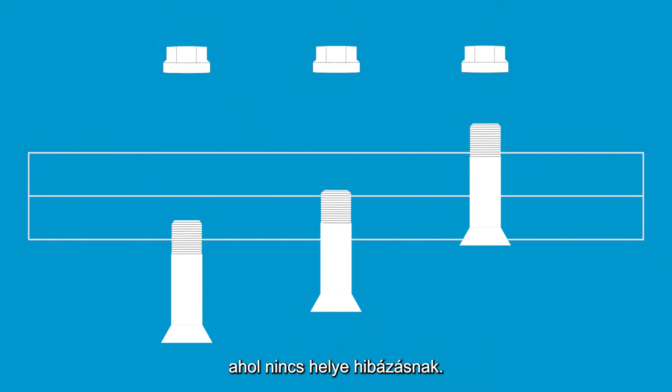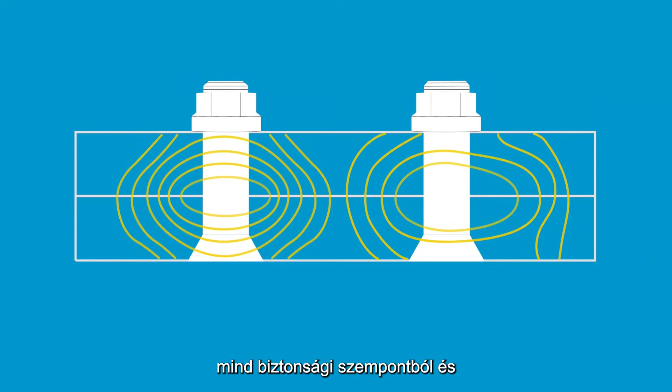Tightening is a fundamental production process in the aerospace industry, where there is no room for error. Even small deviations in the tightening process can have big consequences, both from a safety aspect and from a cost control perspective.

Currently, about 75% of tightening tools used in the aerospace industry are basic clutch tools, air or battery powered. This means that assembly errors can easily go unnoticed due to lack of process control.

We have seen examples where one simple application with an O-ring wrongly assembled and tightened without process control resulted in rework cost and productivity losses amounting to 100,000 euros.

In another example, a customer experienced slowed down production, quality issues, and need for costly investigations as a result of the use of an incorrect batch of nuts coming from a second supplier. This led to a cost of 70,000 euros.

Now imagine that cost and extra work for every single mistake that is made. This can create a big impact on profits.

The solution for the clutch tools issues is to use advanced transducerized tools, which happens in approximately 25% of all aerospace applications. However, these solutions sometimes come with their own set of challenges.

When used in cramped areas, they often can become big and bulky. This makes the operator's job more difficult and ergonomically challenging. And if a critical tightening needs to be done with full traceability, the tool setup procedure may become a demanding task requiring special skills.

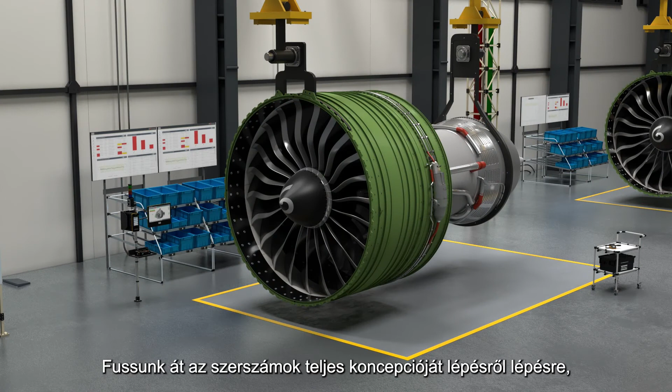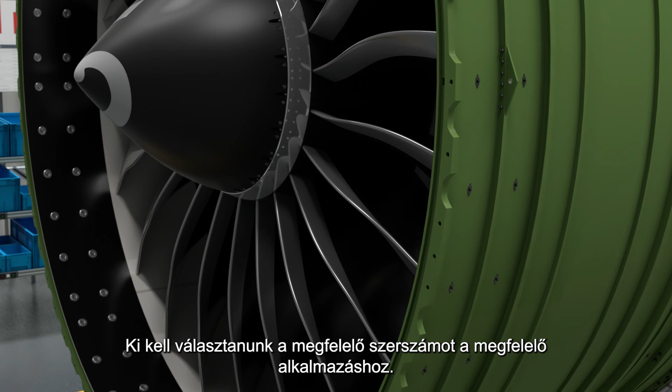Let's go through the whole concept of IxB tools step by step, looking at the example of this final assembly station. It all starts same as always. We need to select the right tool for the right application.

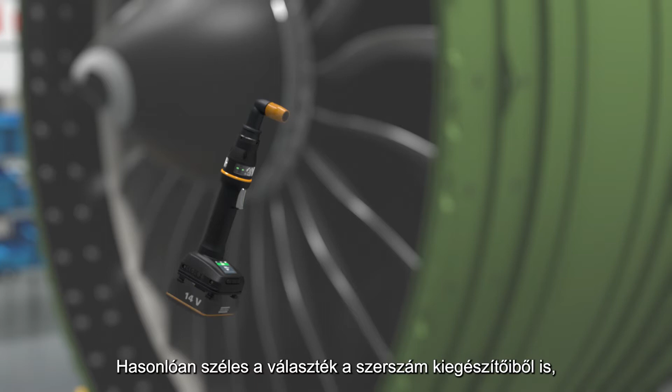In the IxB family, we have a wide selection of different tool models specifically designed to fit exact specification requirements. Once we've chosen the tool, we also have a variety of options for tool accessories, like batteries and front parts. Our tool needs to perform certain functions, and here we'll let you decide its functionality level.

Select from one of the options that you might already be familiar with if you know our Power Focus controller offering. And the final step for the tool that does critical tightening is to set up the process control and communication to the production system, which traditionally was handled by a physical controller box.

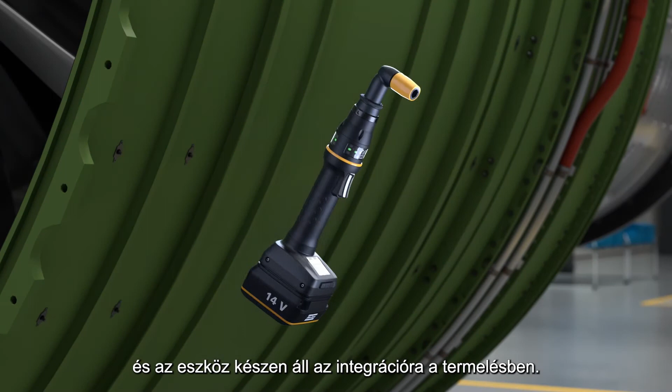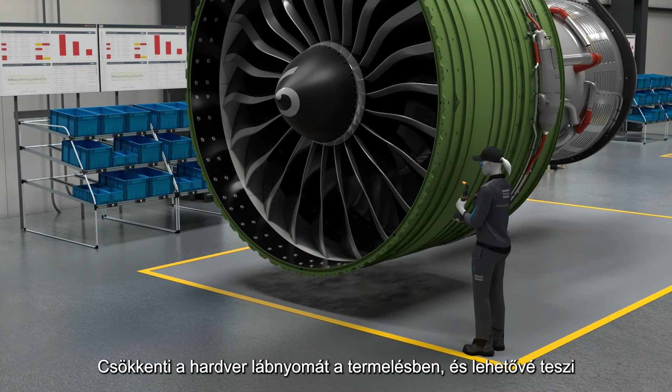Here is where Tensor IxB makes a big difference as our first tool with integrated controller platform. From now on, we have an alternative way to traditional physical controller setup. All you need is to enable the integrated controller function, and your tool is ready to be integrated directly into your production system, fully managed by the integrated controller inside, reducing the hardware footprint on the line and enabling transformation towards a new, smart, flexible way of manufacturing.

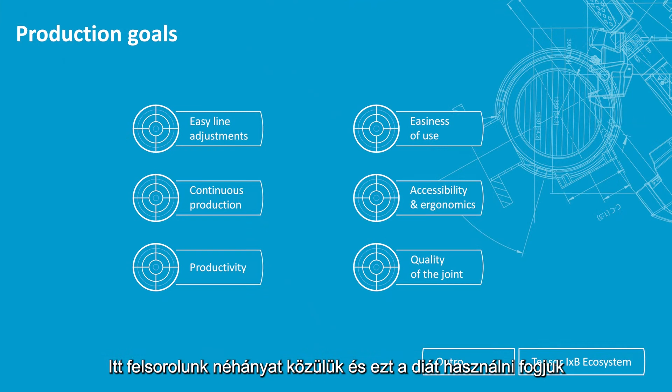Let's look at how Tensor IxB tools with the new integrated controller platform can help you achieve your production goals. Here we have listed some of them, and we will use this slide to navigate between different aspects of production where the new Tensor IxB makes a difference.

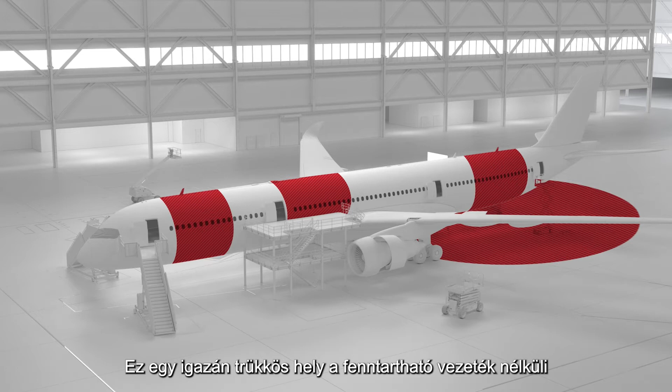Let's look at the goal we call continuous production, describing how Tensor IxB can improve your uptime in challenging connectivity environments. When you look at the aerospace industry, it's a really tricky place for sustainable wireless connection, with lots of closed metal environments and huge facility areas, where today usage of wireless tools with controllers is almost impossible without getting into the radio shadow environment, which leads to many challenges.

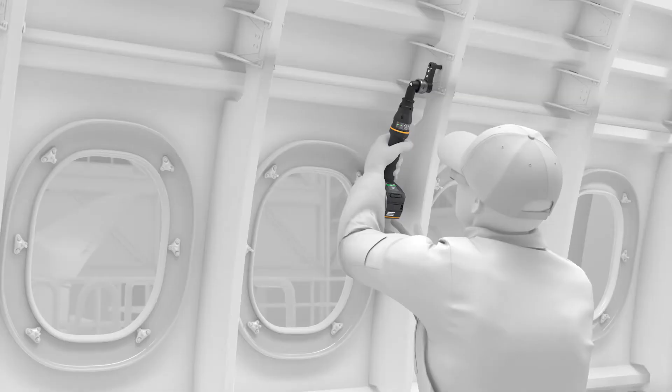But from now on, things are about to change when Tensor IxB can allow us to continue production even when there is no wireless connection. How will it work? Let's look closer.

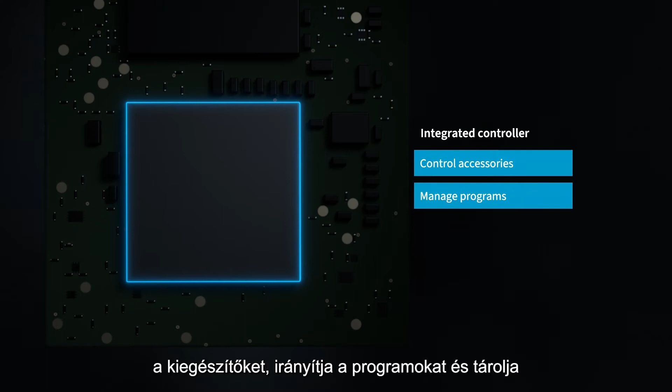It's all possible with the integrated controller, which is able to autonomously control accessories, manage programs, and buffer result data. It will send all data to the production system when connection is restored. On top of it, IxB tools have dual antennas to reduce the risk of bad connection due to obstacles or interference with operator hands. This, together with a buffer battery, will maximize the wireless connectivity uptime.

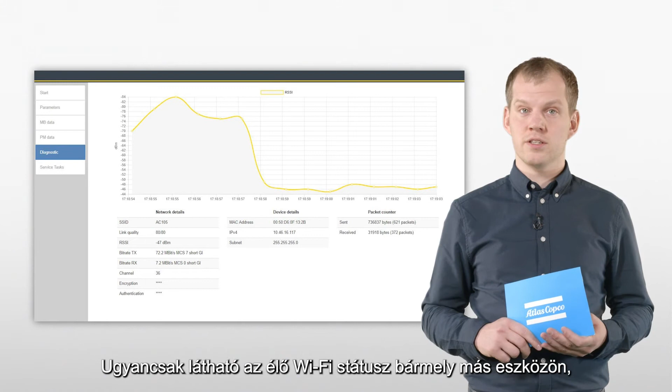And while talking about good wireless connection, you can now see a live Wi-Fi status on the tool display to quickly troubleshoot and solve connection problems. You can also see the live Wi-Fi status on any devices, bigger screens or laptops, for deeper investigation.

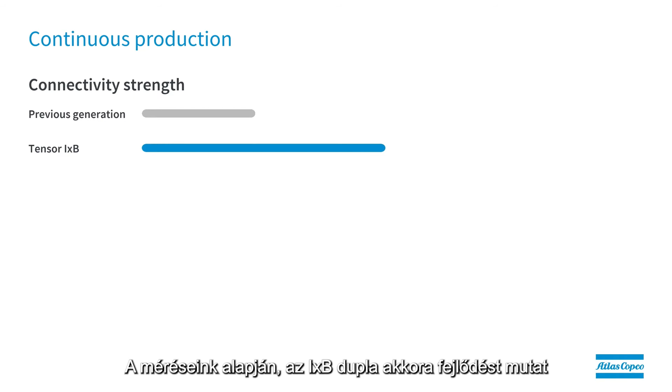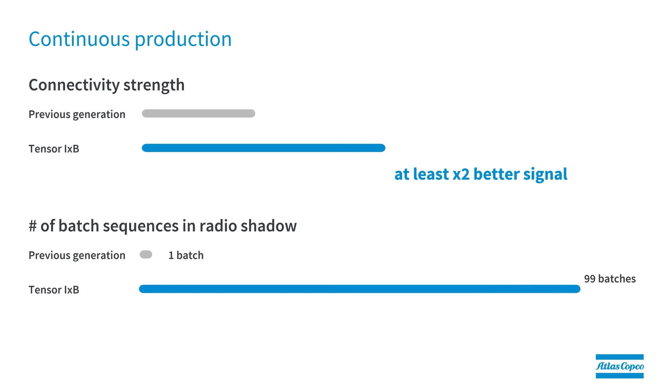If we compare today's battery tools to the new IxB tools, we see a dramatic improvement in wireless connectivity. According to our measurements, Tensor IxB tools show a double improvement in signal strength. And unlike the previous generation of tools, IxB can handle different tightening programs while being in the radio shadow. In summary, Tensor IxB tools help you keep a seamless production flow in challenging connectivity environments.

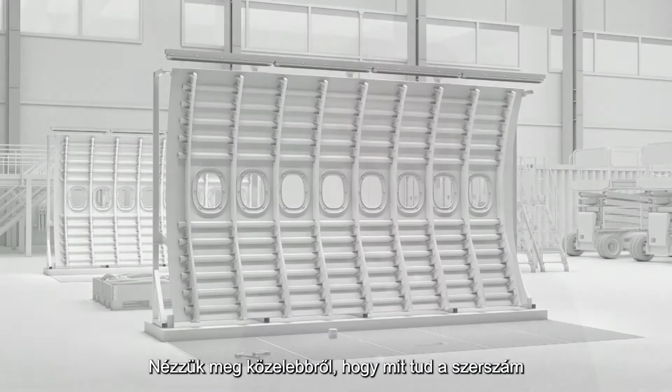Let's go back to our production goals. Let's look at accessibility and ergonomics. Here we have a big innovation coming with our Tensor ICB range, a compact nutrunner within the IxB tool family. Let's look closer at what it can do in the example of cramped area applications.

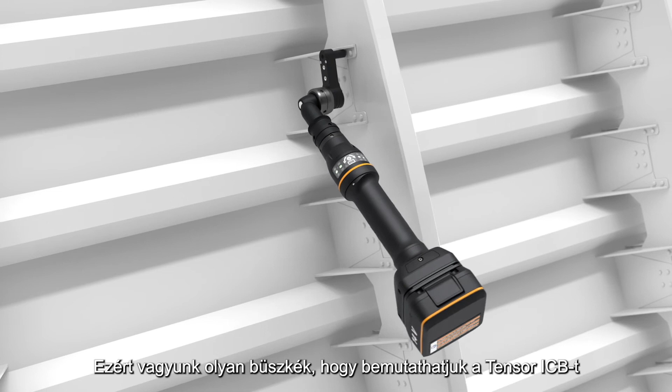There are many ergonomically challenged applications in every production process. Some of them are hard to reach and access. For some, the operator movement is restricted. Others create stress and fatigue to the operators due to unnatural working positions. And we at Atlas Copco have spent a lot of time researching how we can develop a tool that will make operators' lives easier. That's why we're so proud to introduce Tensor ICB, which gives ergonomic access even to the least accessible joints out there.

In this example, in the aerospace industry, the tool can be combined with a variety of special attachments required by the production process. And if we look closer at the tool itself, there are several innovations that we want to highlight.

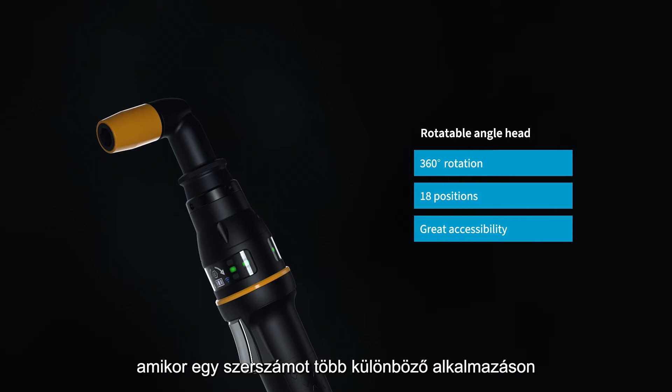First of all, we have a fully rotatable angle head with 18 different positions that the operator is free to change at any time wanted. It gives better access to the joints and creates versatility when one tool can be used for many different applications. Tensor ICB also has a fully rotatable trigger.

It can be adjusted at any time or locked if needed in any of its 20 positions. It means that you can adjust the grip position of the tool to make it more suitable for the particular application and experience Tensor ICB's superior ergonomics in your own way.

And on top of it, together with the new ICB tool, we are releasing a new 14-volt battery, the smallest battery in the IxB tools family. It's very lightweight and can be used with different tools from both the ICB and ITB tool ranges. Now let's compare Tensor ICB to our previous generation of battery tools.

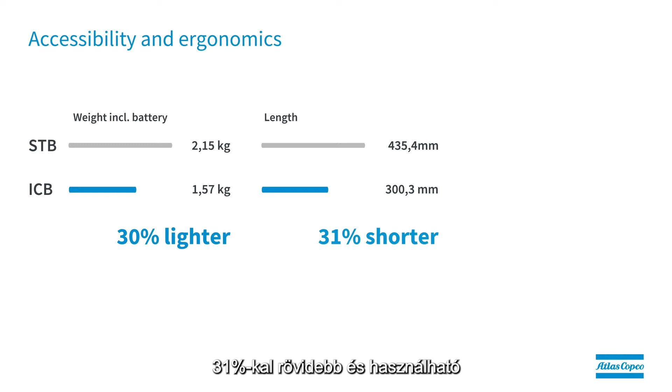You can see that ICB is 30% lighter, 31% shorter, and can be used with only one hand, which gives an operator the option to free up another hand if needed. All this makes Tensor ICB a perfect choice for cramped area applications.

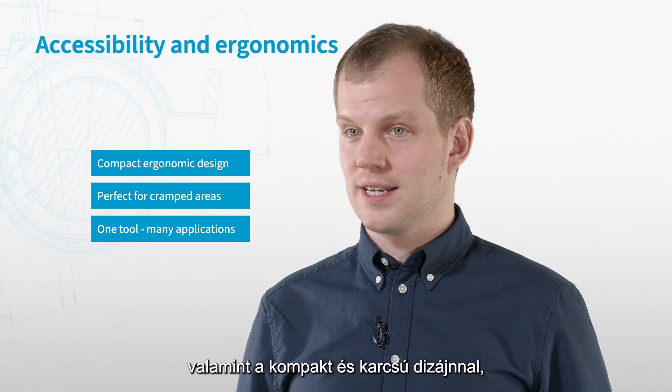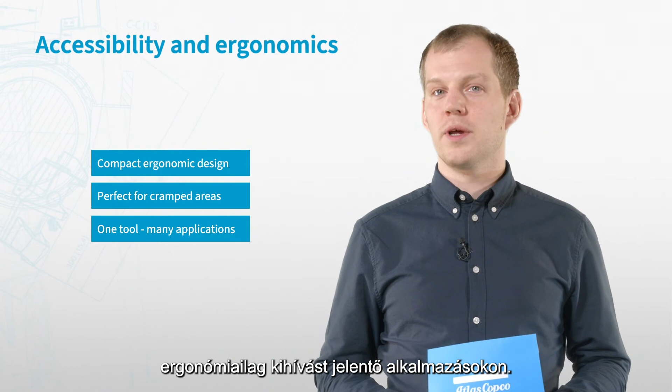In summary, Tensor ICB, with its rotating head and trigger, as well as compact and slim design, is a true versatile tool that can be used in different applications at once, making ICB a revolutionary tightening tool for ergonomically challenged applications. Let's go back to our production goals.

When it comes to easiness and user-friendliness of Tensor ICB, we could describe it in words, but instead, let us simply show it to you.

First of all, we don't need any special software to access the tool menu. Simply open an internet browser and type in the IP address of the tool connected to our network. Press Enter and the Atlas Copco logo will appear, showing that the web interface is opening. And here it is, the IxB navigation menu. Does it look familiar? For those who worked with our Power Focus controller before, this will be a no-brainer.

Same interface saves time on training and adoption of IxB tools at your factory. Let's do something with our tool. Let's create a new tightening. Click the Tightening tab and press plus to create new.

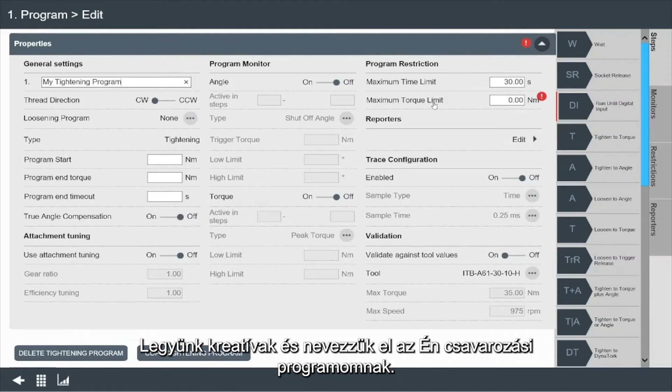First, we give the tightening program a name. Let's be creative and call it My Tightening Program. And then we can simply drag and drop the tightening steps from the library to create our own strategy.

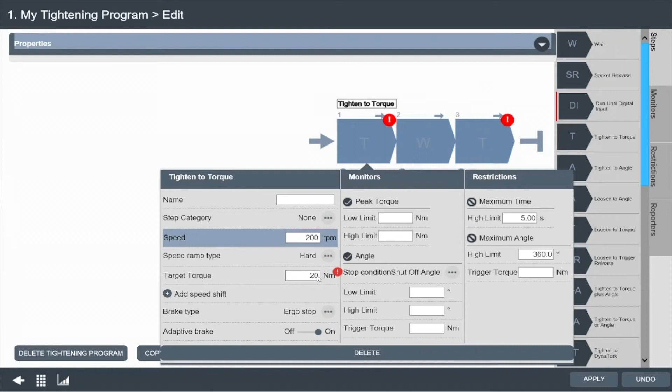Easy. Let's do a 3-step tightening. For each step, we can set different parameters. First step for rundown process with higher speed. Second step is a pause for relaxation. Third step for lowering the speed and achieving the target torque with high precision.

The result of the tightening can then be seen directly on the tool display. And if the result was not okay, you can also get a message containing the details of what could be wrong.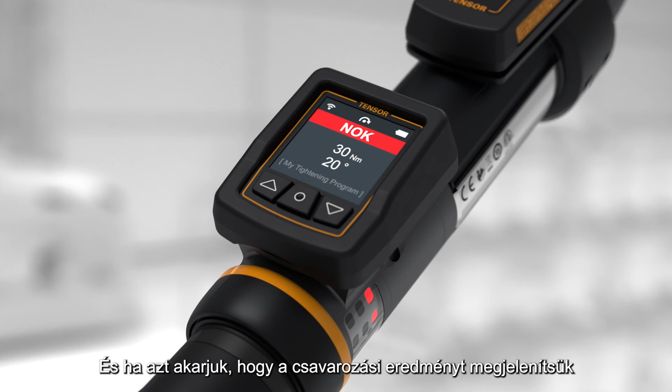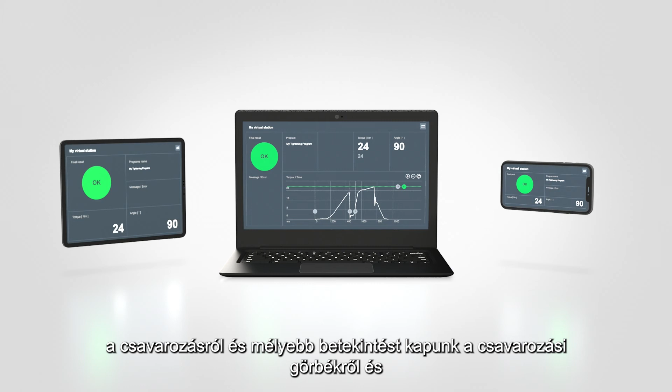And if you want the tightening result to be displayed directly in the working station, just use the tool web interface on a bigger device, like a PC or tablet, or on any device that runs a web browser. And with the web interface, you can also see more information about the tightening and get an in-depth view of the traces and events.

In summary, IxB tools have an easy-to-use platform that doesn't require any extra training or special skills to start using. Let's go back to our production goals.

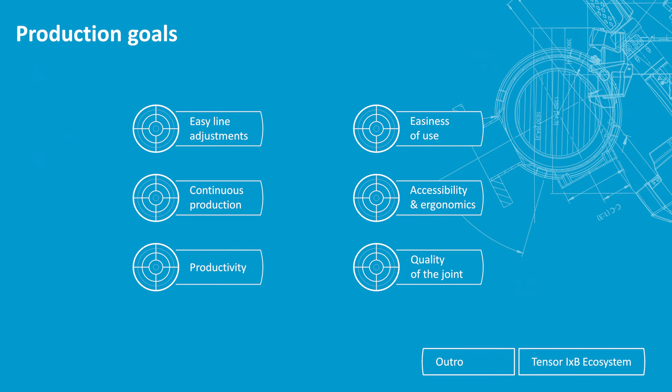Let's take a look at the quality of the joint. Achieving high quality of the assembly is top priority on our customers' agenda. Let's see how IxB tools can support you in bringing quality to the next level.

Let's give you one example. Let's say that you're doing a batch of 5 tightenings. 4 of them are okay, but the 5th presents a not okay. There could be different reasons for that, for example, random mistakes. But if the problem repeats itself, we have to investigate.

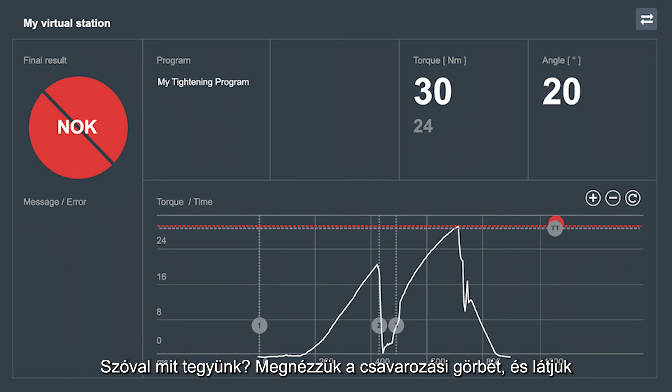So what do we do? We look at the tightening trace and we see that the final torque is very close to the torque window limit. But it's quite hard to see the details, right?

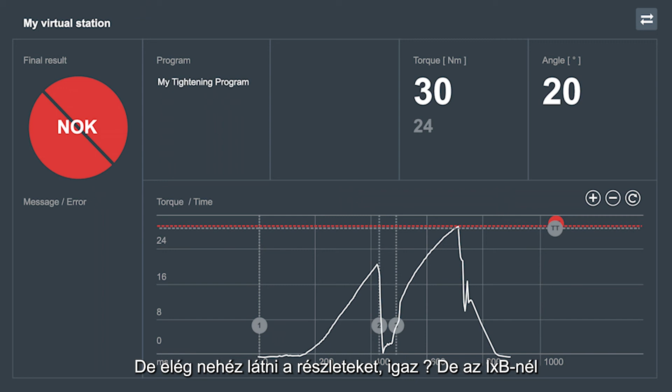But with IxB, we are now improving the resolution of the trace by 10 times. Let's now have a deeper look. And now we can clearly see that it's a torque overshoot. A torque overshoot can be solved in different ways.

One of the solutions can be to adjust your tightening program by adding more steps. And now we have up to 16 steps with Tensor IxB, allowing you to create the best tightening program for your applications. But IxB has even more innovations for better quality.

Together with our standard 5% tools, we're now introducing a new range of high accuracy 3.5% tools to help you decrease the torque window even more.

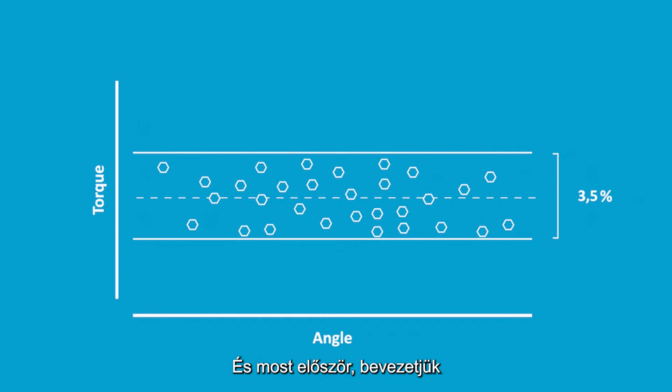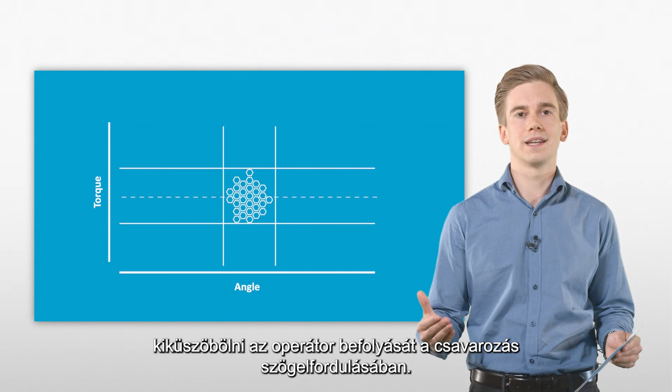And for the first time ever, we are introducing gyroscope with true angle strategy on our battery tools. That helps you eliminate operator influence on tightening angle. Altogether, it narrows down the torque and angle window, making IxB the most precise cordless tool in our portfolio.

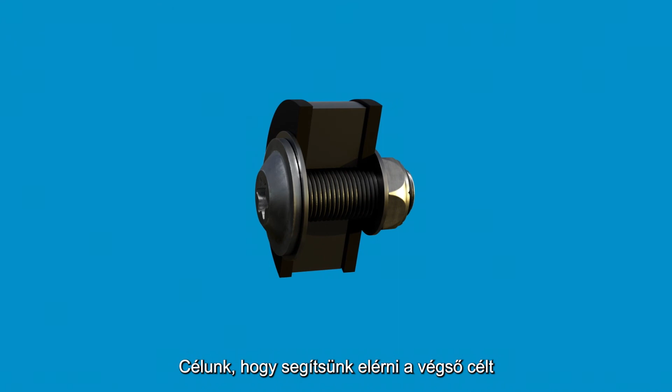Tightening is a fundamental process in the assembly industry. Our aim at Atlas Copco is to help you achieve the ultimate goal for your production: high quality and safe products for consumers in various types of industries.

Products that will drive us towards a better future and create a safer environment for people all around the world. We believe that together we will make it easier to transition to a smarter way for sustainable manufacturing. Thank you.